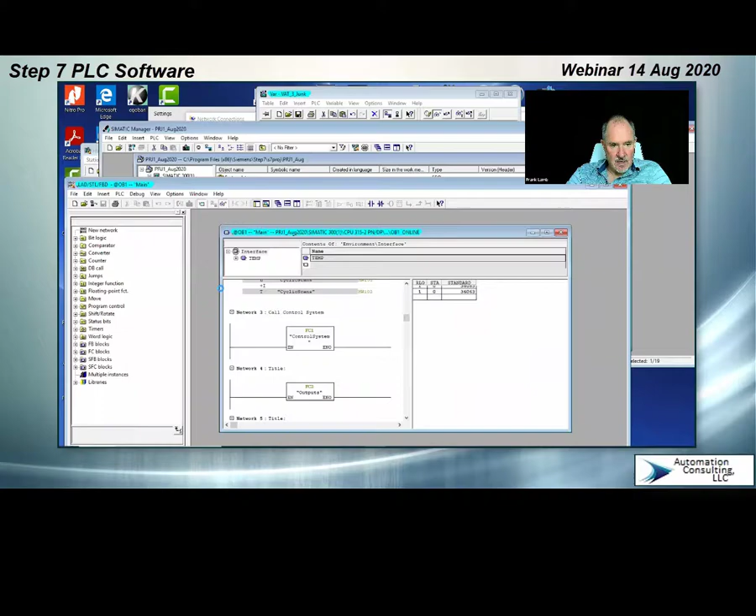What this does is sets auto and manual mode using push buttons. Then we do a cycle start. As in my book, we use a timer, 3-second timer. So when the push button is on, the timer times.

You can see we're already in auto cycle here. What this does is prevents the cycle start request from being on when you're pushing the button if you're not already in auto cycle. So this is kind of important because we use this to sound the horn if we wanted to give a warning to people that the system's starting up. So this prevents the horn from sounding when the system's already in auto cycle.

Cycle stop request. You can see here, if we don't have a permissive for the cycle stop request, then it just sits there and waits. I'm going to toggle that and push the button. You can see here we are in auto cycle. I toggle the button. We have a request for cycle stop, but we're not allowed to stop the cycle yet until the permissive appears here.

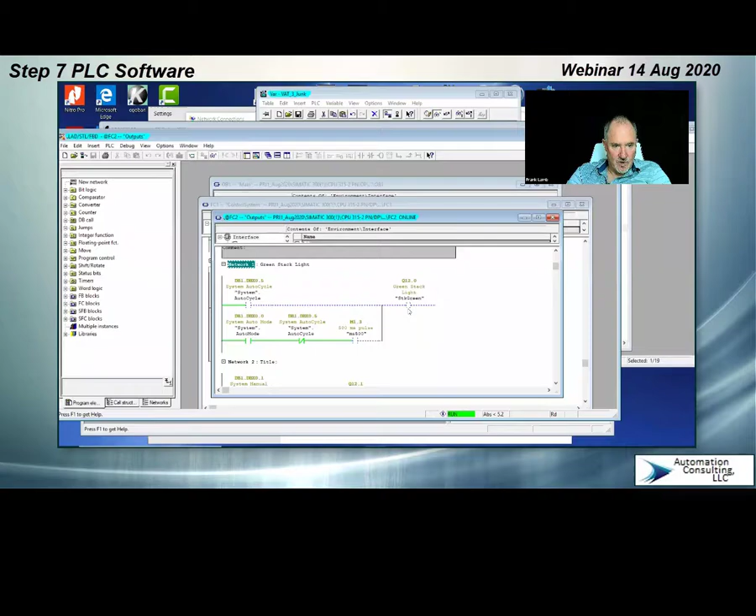Other things I've done here is I created some physical outputs. The stack light, you can see here we're not in auto cycle, so the stack light would be blinking. The idea behind the stack light is this is the trainer that I'm using here. It has a stack light on it. This is the Siemens trainer that I'm using. You can see it's in run mode down here. I've got it connected via Ethernet. It's similar to this trainer, which was the trainer that I used last week for the Allen-Bradley seminar.

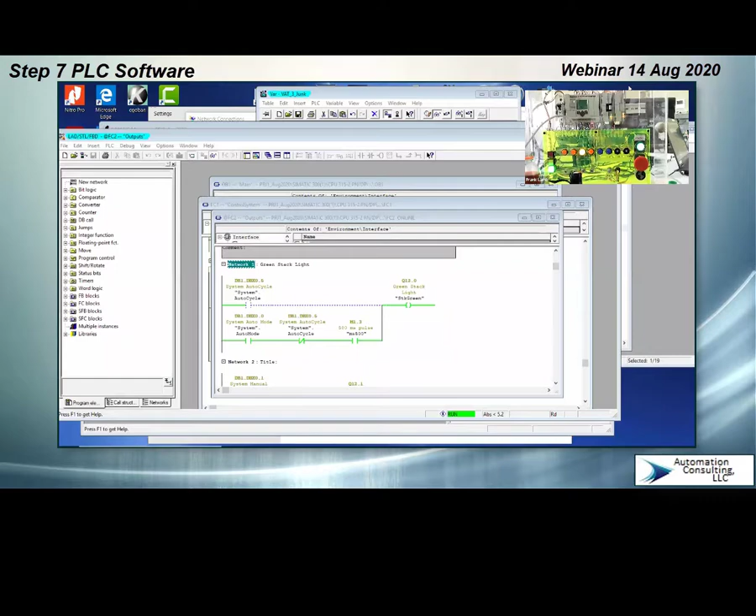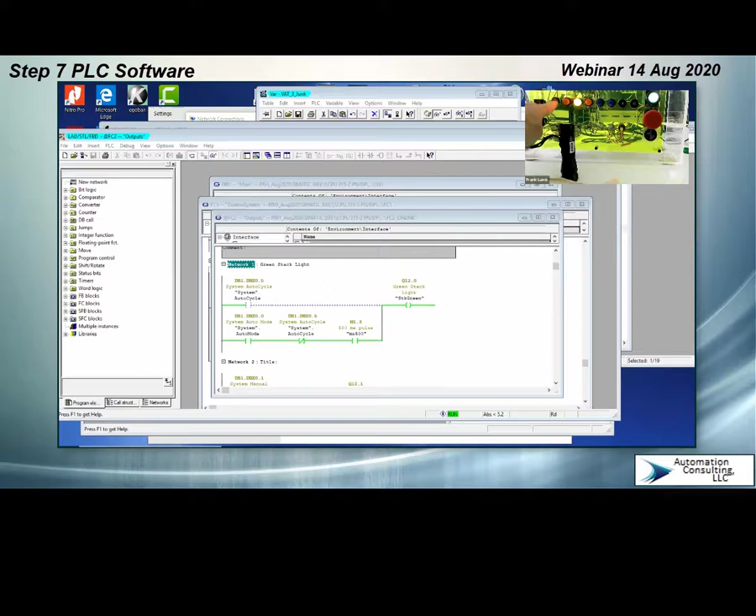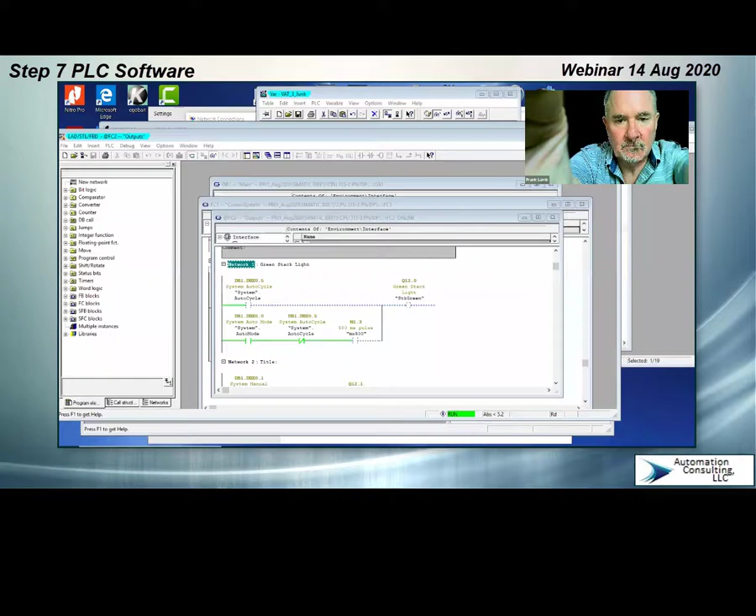So you can see the stack light down here, which is already lit. If I do a cycle stop, here you can see it blinking. So that is similar to what would be going down here, but I haven't wired this all up yet. So cycle start. And you're blinking. And that's the same kind of thing that we have here. So once again, stack light is yellow if we're in manual mode, and it's red if we have a fault. So that's all I'm really doing with the physical outputs here. Notice that I've assigned them to Q12, which is the first card that I have in the outputs.

Let's take a quick look at the hardware, see what we've got here. This is the hardware setup that I've got currently. Got some input cards here, words 0 and 1. Those would be I0 and I1 bytes. These are I4 and I5 bytes. These are the defaults that are assigned based on the slot position. So slot 4 is always assigned to byte 0 through byte 3. Slot 5 is always assigned to byte 4 through byte 7, and so on. Slot, let's see, 6 is an output card, slot 7 is an output card, and then slot 8 is an analog card. So that's kind of how we've set up the hardware.

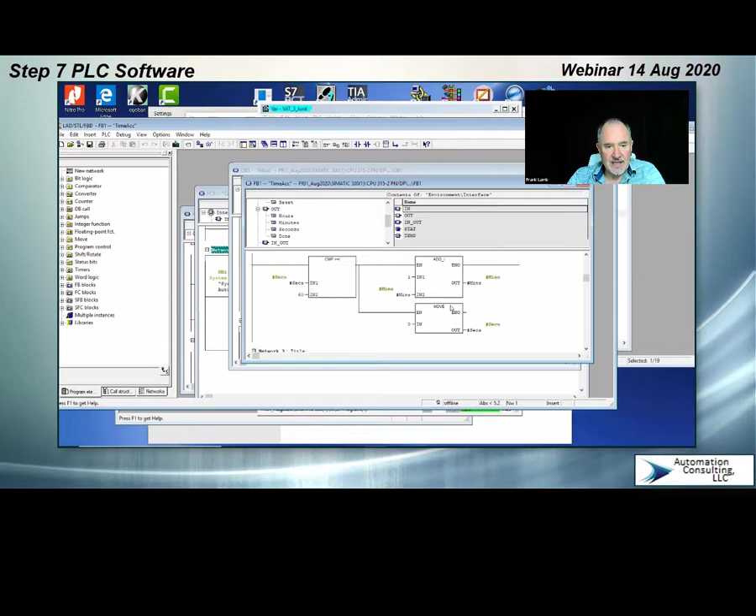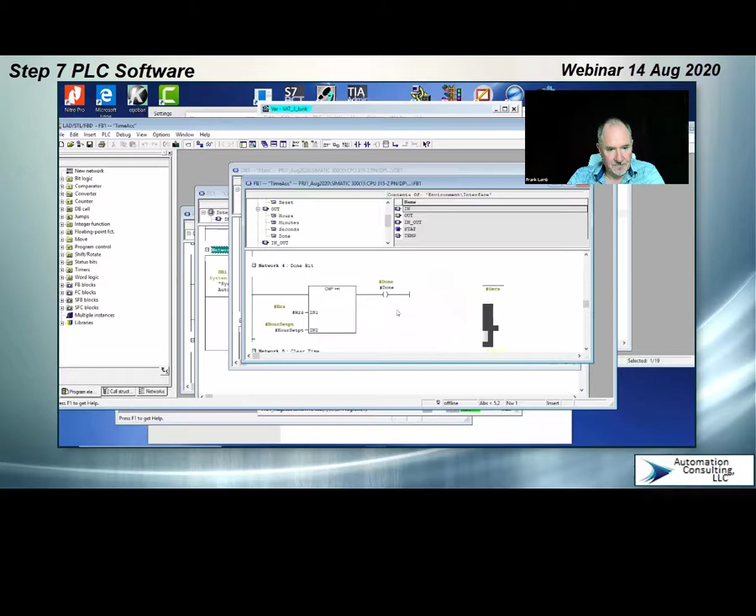So we're just counting here, adding seconds. When the seconds are at 60, we add 1 to the minutes and reset the seconds. So that's just like a counter, except I'm not using Siemens counters. Once again, when the minutes hit 60, we count the hours. We move 0 into the minutes. When the hours are greater than whatever you have as your set point, then you are done. Done bit comes on, which is an output parameter. So it comes on as a bit. The reset moves zeros into all 3 of the seconds, minutes, and hours.

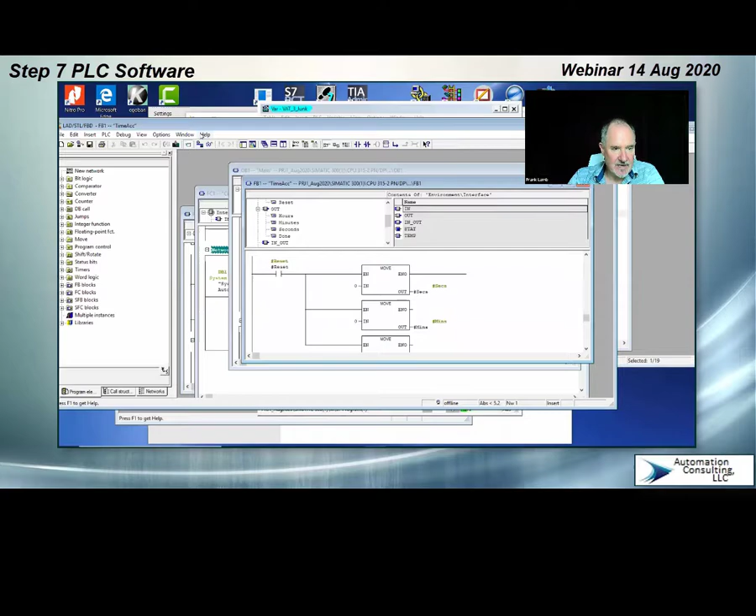And then here, notice that I use statement list, STL. And the reason is if I had used move statements like this, right? Here are 3 move statements with a reset. It would have looked something like this. So there would have been a whole lot of JNBs. And the only thing we really needed was the load and transfers, right? Load 0 into minutes, transfer into minutes, and so on. And that's why I did this.

So I actually did it in ladder first, converted it to statement list, and then there was a whole lot of extra stuff. And so I just deleted the extra stuff. And this just constantly moves this stat variable into the output variable. The reason we had to do this, you can't do any math or add or anything to output variables.

So for instance, if I had tried to pass this out, I couldn't add the hours to the hours. It wouldn't let me do that to an output variable. You can't add it, at least not in ladder. Sometimes you can do that in statement list, but you can't do it in ladder. So I'm just guessing here.

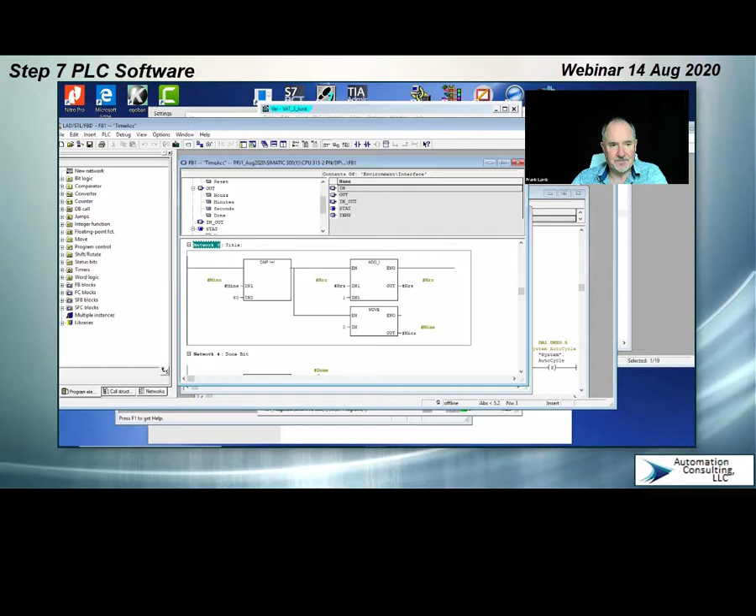But there is no one else on this call. I'm the only participant, which is why I'm talking to myself. I'm just recording all of this. No one showed up today. I'm the only one, but I'm recording it anyway. So we'll see how that works out. Got about 25 minutes left. Don't know if anybody else is going to show up. If they do, we're ready to go.

So that's a bit about the function block that's doing the time accumulation. This is a reusable function block, which means that everything in here are these local variables. I did not use any memory words or data blocks inside of here. Everything has to be local up here in these parameters. Very important to make it reusable.

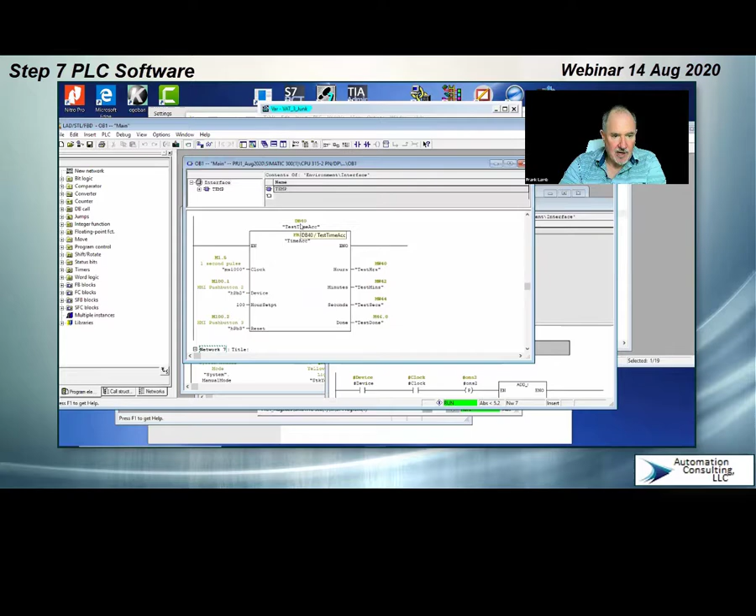Now, what I mean by reusable is if I go to OB1, you can see that I call FB1 with one data block here, and I pass these variables out, and I'm using different variables in. I'm using a couple push buttons. And then down here, I call the same FB1 again, but I use a different data block. These are called instance data blocks. They get created automatically.

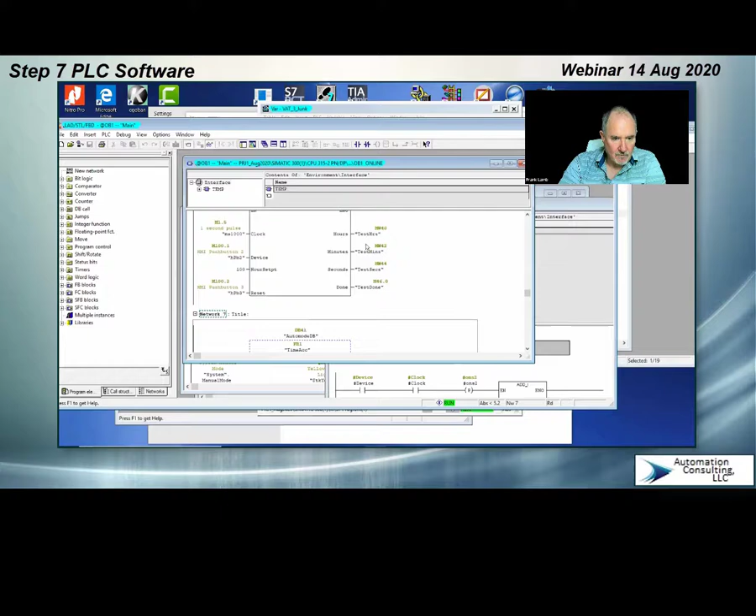And if I monitor these, you can see I've got different times in here than I do in here. So we got 54 minutes, 21 seconds here. You've got 18 minutes and 4, 5, 6 seconds here. So we're using different internal data blocks.

Here I use memory words just as a test, right? Made test hours, minutes, and seconds. And here I used a UDT. So I made something called auto time, and then I used the UDT to put the values in it. Now you notice here, my hour set point is at 0 here, and that's why my done bit is on here. So I'm going to change that.

I'm going to go into my junk DB here, and we'll just put in this hour set point, which is DB4.DBW6. So if I make this decimal, we can then put any kind of set point we want in here. I made that part of the UDT. Make that a little wider. And we'll put, say, 10 in here. And we'll let it run for a while.

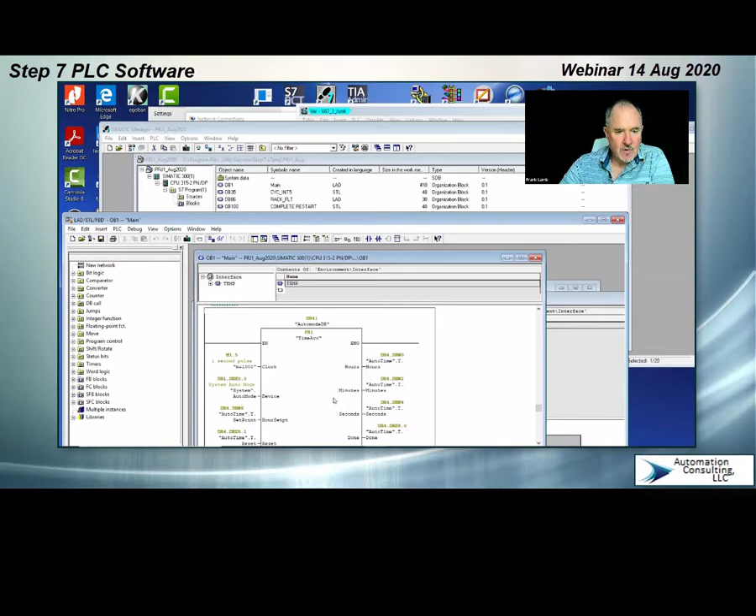So once again, make sure it's saved, downloaded. There's nothing wrong with downloading more than once. So here I have my little test FB with DB40. Here I have my time accumulation for auto mode, right? And the next thing I'm going to do is copy this, paste it.

We're still going to use this same little ticking time pulse, but this time we're going to use machine status. Actually, we're not. We're going to use system. And we're going to do our starved first, I believe. Then we're going to use our machine status.

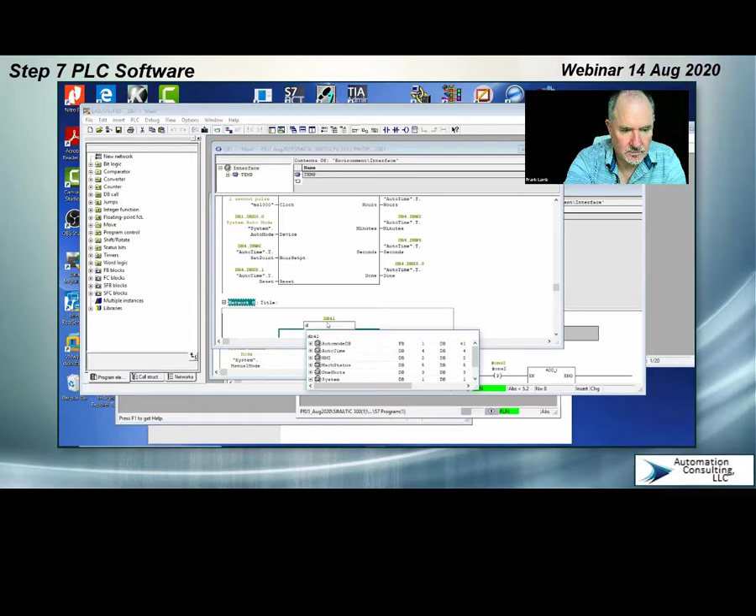Minutes. Seconds. And done. So now I've got all my output variables here, and we're going to use a new data block. We'll use DB42. And it says it doesn't exist yet. Do you want to create it? Yes, I do. We don't have a name for it yet.

So we're going to call it starved DB. So very important, we want to download this data block first. And then, I think we've downloaded the other data block. Now we can download OB1.

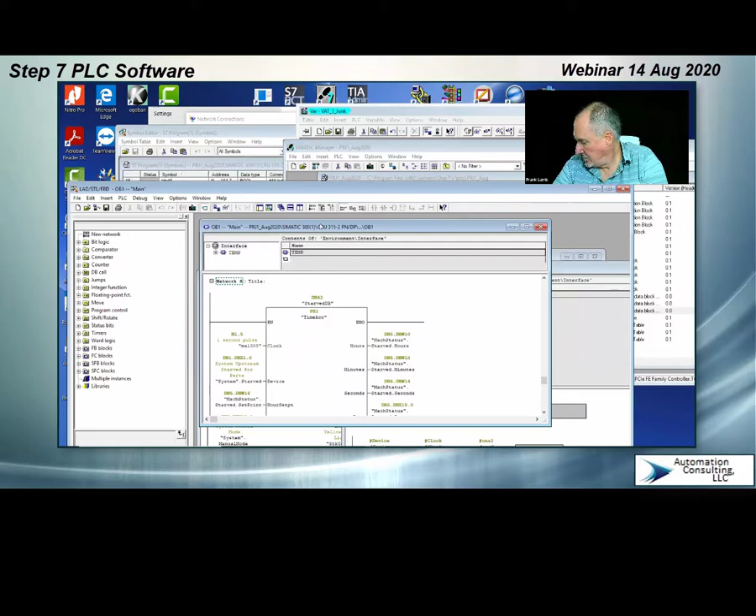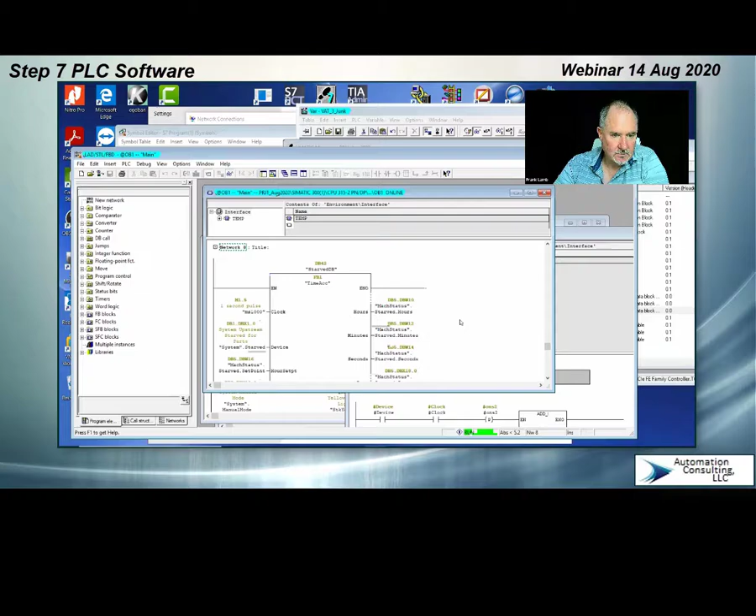And we're running okay. We don't have any red lights, that sort of thing. It's very important. Go ahead and see if we're, whoop, accidentally hit download instead of my glasses. That's okay. So we're going to toggle our starved device here. There we go. You can see we're one.

It's kind of not obvious where some of these things are. And you can see we are accumulating our time. And our time just sits there at 29, with the clock ticking away.

So if I go offline, paste this a couple times, it's actually pretty easy to just change these to whatever we need them to be. Say DB43 doesn't exist. I want to generate it. DB44 doesn't exist. We want to generate it.

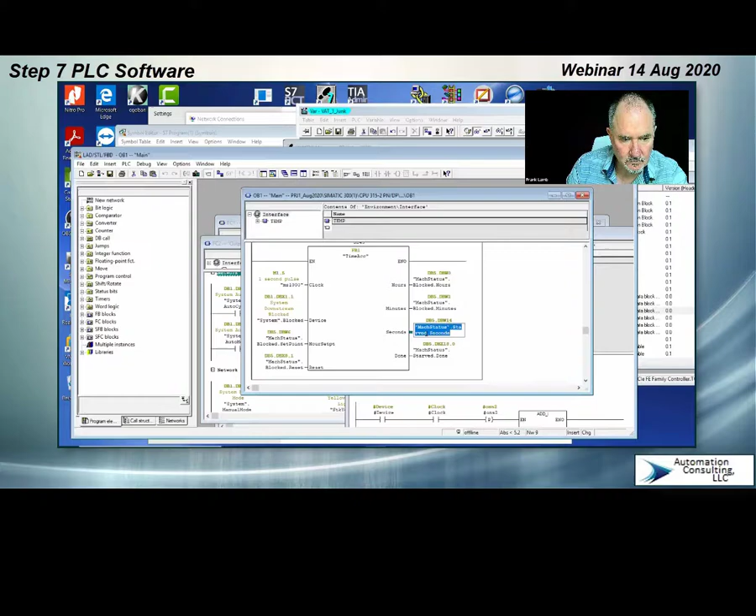If you're a really fast typist, then you can just type this in, but I'm better with the mouse than I am with the keys. So this is pretty quick compared to typing everything in all the time.

So before we download this, it's going to be very important to download all the data blocks first. But I'm going to show you right after this what happens if you accidentally download OB1 before you download the blocks. So we'll make this, I don't remember if this is idle, what we did here. But I think we can just pick anything. I don't think it really matters which block is which. We just need to remember which is which.

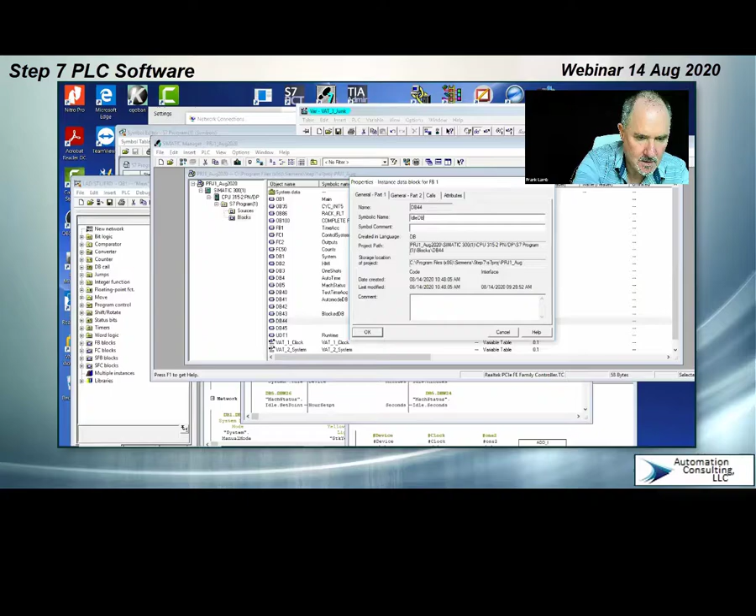These names aren't super critical here, but where they do show up, and I'm going to purposely kind of forget some things here. Where they do show up is here. So that kind of shows you what this block is, and it allows you to match the data block to all these tags. So now I'm going to show you what happens if I do a download here.

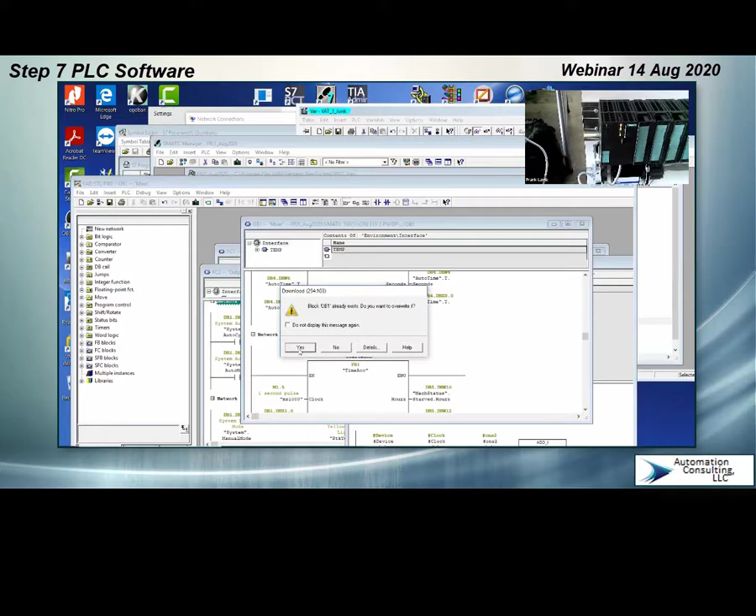It's going to cause a problem if I download OB1. So I'm going to go ahead and do it. While I'm doing it, we're going to look down here at the processor and see what happens. So I'm going to hit download. Says it already exists. Yes. And what happened? We got a red fault light.

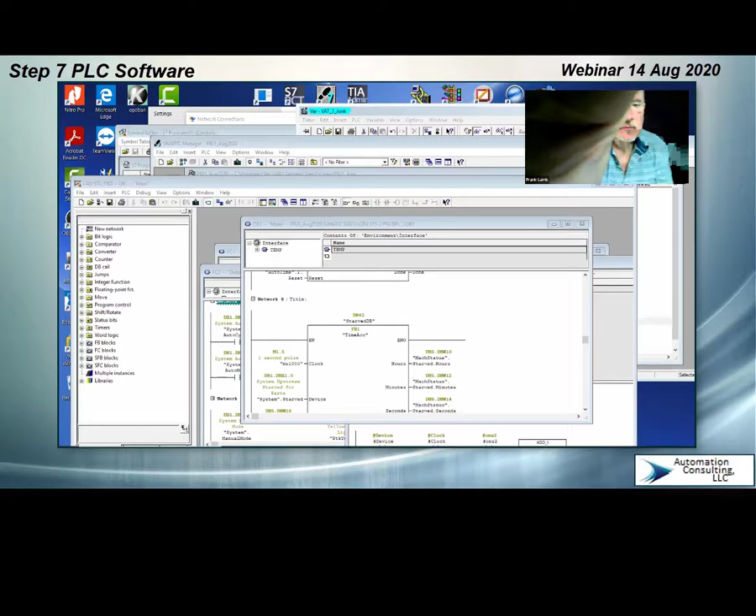And the reason we got the fault light is because I'm using all of these data blocks, but they don't exist in the processor yet, right? So here's a way to check that. Okay, so here's how you check that out. If I go here and I look at processor, you can see 41, 42 are in there, but the other ones aren't.

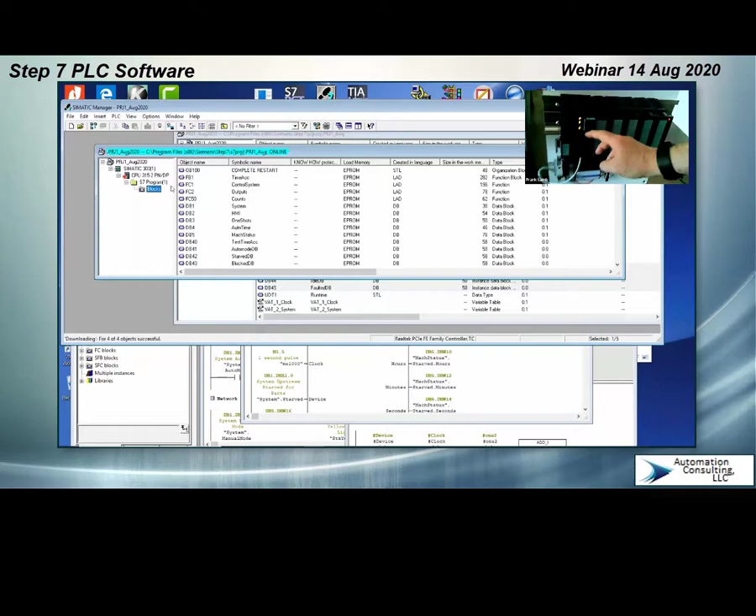So I'm going to download 45, 44. I'm going to download all 4 of these. And you can say all here. Now they're all in the processor. If I'm not sure, I can always go here and look. So how do I fix the problem with the processor, which is this fault? Well, of course I can reset this with this button. That will fix it.

But the other thing I can do here is I can download OB121 and 122. They take care of faults like that. So we're going to create those real quick, download them. And they will stop us from going into stop mode every time we fault when we have a programming error. So a common programming error would be forgetting to download things. That is the job of OB121 and 122. So you download these, and they prevent the processor from stopping.

Well, that is the end of, oh, someone showed up. Hello, Lloyd. Are you there? Can you hear me? So I can't see you or hear you, but it looks like you're here. So this is a little group chat. You can see this here. Unfortunately, Lloyd, I don't know if you can hear me. Hopefully you can.

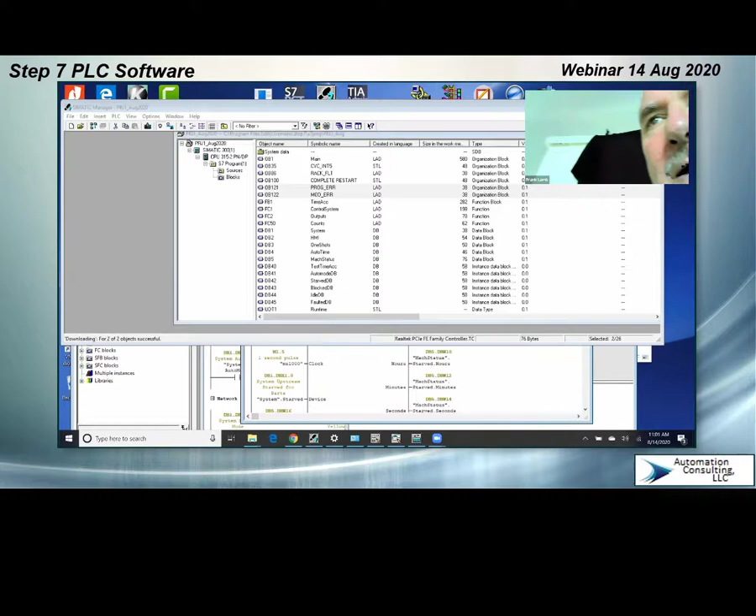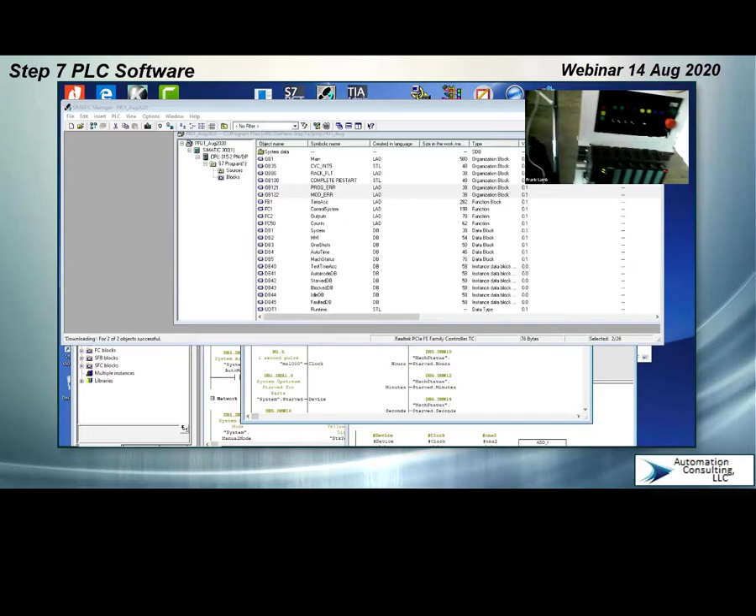So this project I started yesterday. Let me see if I can see your camera, but I don't think you can see my camera. I can actually see you, but all right, yes. Can you see a PLC down here? Yes, I can see. It's a Siemens PLC. Yeah. Okay, good. So this is the trainer that I'm using. And I just built this yesterday. So I just put power to it, but I haven't wired anything up to it yet. So you can see there's no wires on the back. Yes, I see.

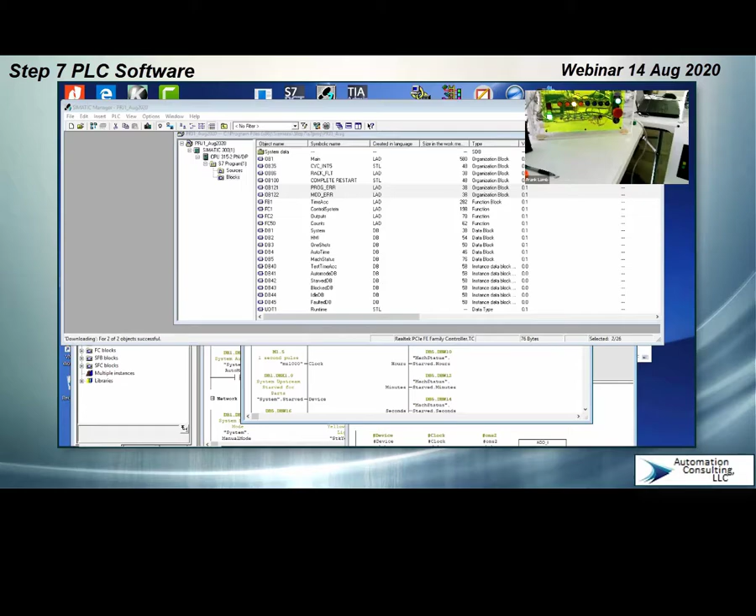Everything that I did here was kind of virtual. This is another PLC that I used last week. So this is an Allen Bradley, and I did a little seminar last week, just like this here. And it's the same, right? It has the same buttons and switches and things like that on it. Yes. But anyway, so that's the way that works. So that's me. All right.

So I'll show you a little bit of what I did here. So of course, first I created a processor and downloaded it yesterday, and then created various different things in the OBs. So the first thing I created here, this is a typical way to do an always off and always on bit.

People use these for system bits, right? Just always on, always off. If I look at it here, this little not bit, this is a cute way of doing it. You know, Allen Bradley, you do it a little bit differently. With Allen Bradley, I can connect directly to the rail with no instructions. That's legal. But with Siemens, of course, you have to use a bit of some kind in series. So this is a cute way to do it.

I used a little bit of statement list, STL, right? Okay. So this is simply an adder. It takes one, puts it into the accumulator, and then memory word 102, which is just an arbitrary memory word, I add it to it and I transfer it back into itself. So it's just an add, kind of like this is, right? One plus this into this. It's the same thing, but it's in statement list.

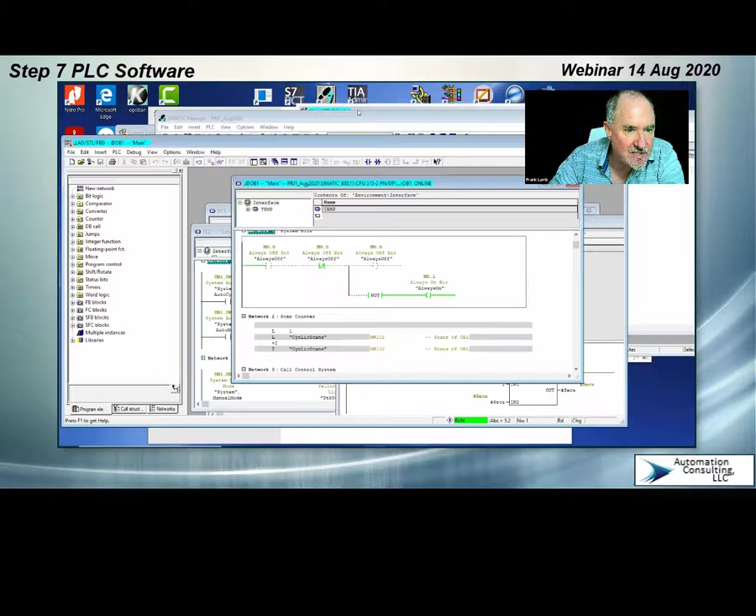So the end result of that is every scan, this is adding. If I look at my variable table, I have this little junk routine here, and this does cyclic scans. Every scan, it's adding one to it. It's just going as fast as it can. Okay, so I just did that to illustrate how scans work. And I use these memory words just arbitrarily. I just picked them, and it doesn't really matter. That's what the M area really is.

So first scans, this is inside of OB100. I don't know if you knew what all the extra OBs do. Are you familiar with those? Organization block 100 is a first scan OB, right? What's that? Are we talking about something like in the Allen Bradley RSLogix 500, the one-shot falling or one-shot scans?

No. If you were doing Allen Bradley, there is a bit in the MicroLogix, for instance, called first scan. It's actually S:1/15. Here, instead of using a bit, which there is a bit, they actually use a whole routine. So this routine runs one time every time you restart the processor. Yes. So all OBs have special purposes. OB100's special purpose is it runs one time on first scan.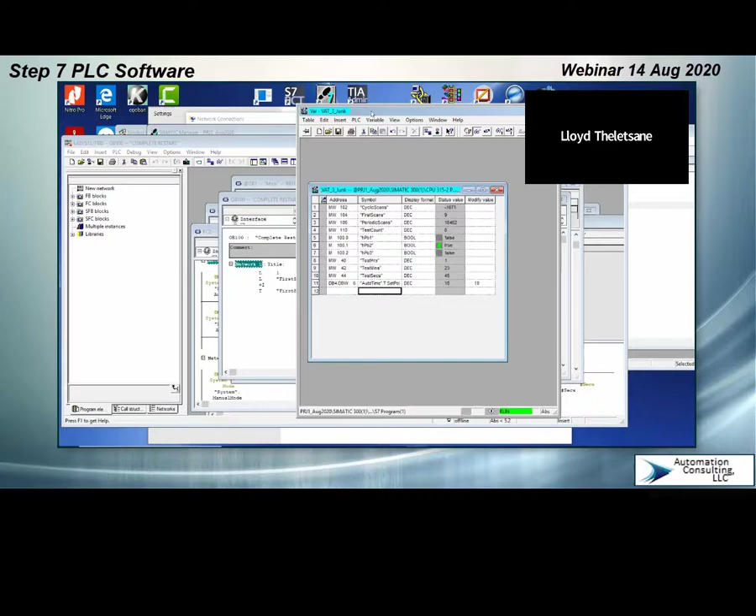So the end result is if I stop the processor, I'm going to stop the processor here, right? So I stop it. It's not in run mode. And when I restart it, this 6 up here is going to go to a 7. Did you see it? Okay. Yeah, the first scan. So if I do it again, it goes again, right? It's counting first scans. Okay. So OBs are all blocks with special purposes. That's this one's job.

It runs the first time. Now these periodic scans, what I did here, it's another OB, and it's a hardware OB. You actually set it up in the hardware. So I'm going to show you that here. There's OB35. If I open it up, it has another little adder inside of it. It's doing the same thing. But the way you set that up is you go into your hardware.

So this is the hardware configuration. This is where you set up all your inputs, outputs, etc. That's where I got my addresses, 0 and 1, 4 and 5, 8 and 9, right? Q8.0, Q9.0, that's what all these are. But if I double click the processor, there's a couple things here that are good to know. This is the clock memory. This is where I assigned a clock byte. I just put a 1 in there.

And this is cyclic interrupts. So you see the 35? OB35, yes. So that's an interrupt that runs every half second. It runs whatever time you want to put in here. So if I put 800 in here, then every 800 milliseconds that will run, right? It's in milliseconds.

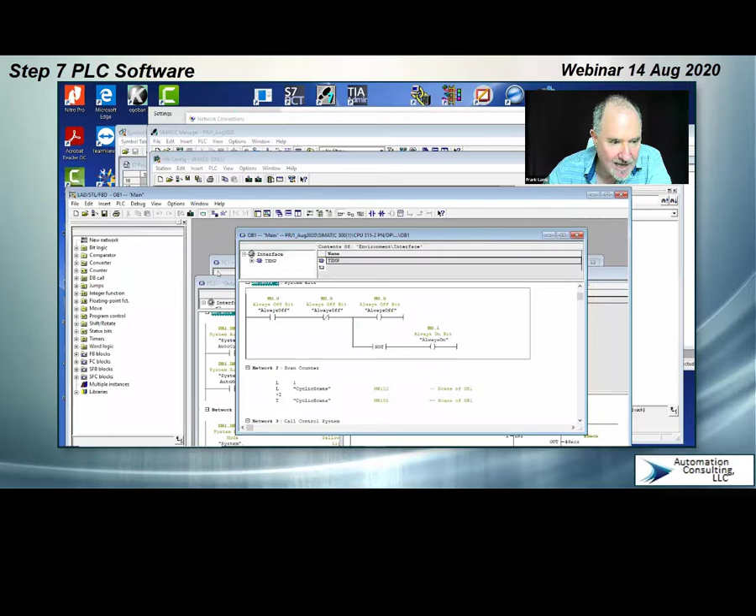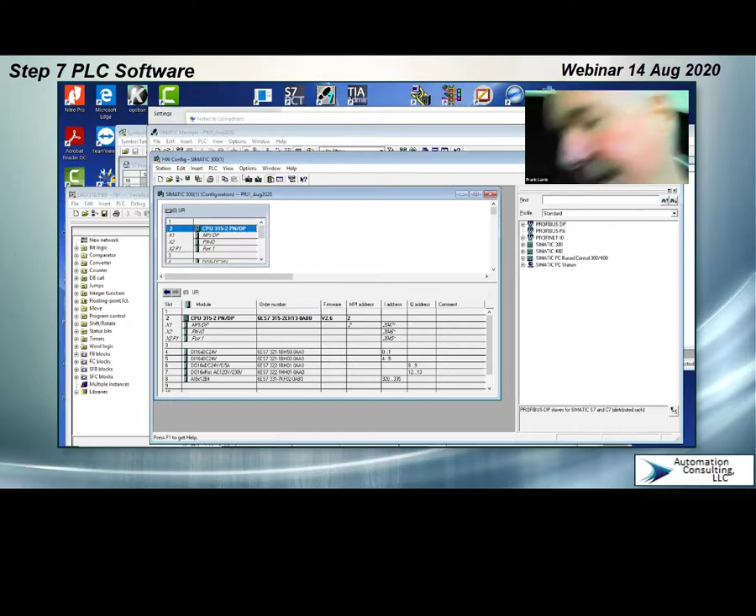So basically during that moment, is your PC on? Is your PLC on by that time? Is your process running, or it has to be off? It is running. It is running, right? So let's try another download, and you can look at it as I download it. So you can see the green light there means it's running. If I do a download now, let's see if it runs. Okay.

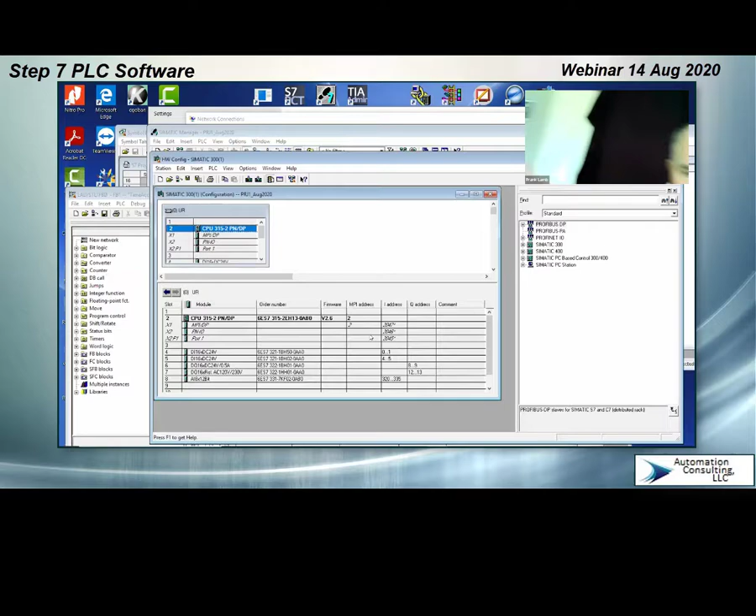Okay, here we go. It says will be stopped for loading of the system data. So it stops, right? It's yellow now, and then it says, do you want a complete restart? Yes. So it blinks a little bit, and now it's back running again. Okay. All right. So anytime you change hardware, you have to do that. Okay. So these other changes, right?

If I change something, some minor thing in the code, I can download and it does not stop the processor. That's a difference between Allen Bradley and Siemens. When I do a download, I don't stop anything in Siemens. Okay. All right. So we'll quickly take a look here, and I'll do some kind of a download. We'll talk about that one later. We'll monitor this.

Okay, so I'm looking at OB1 here, right? It's calling these routines. That's what these are, subroutine calls. I can monitor it, right?

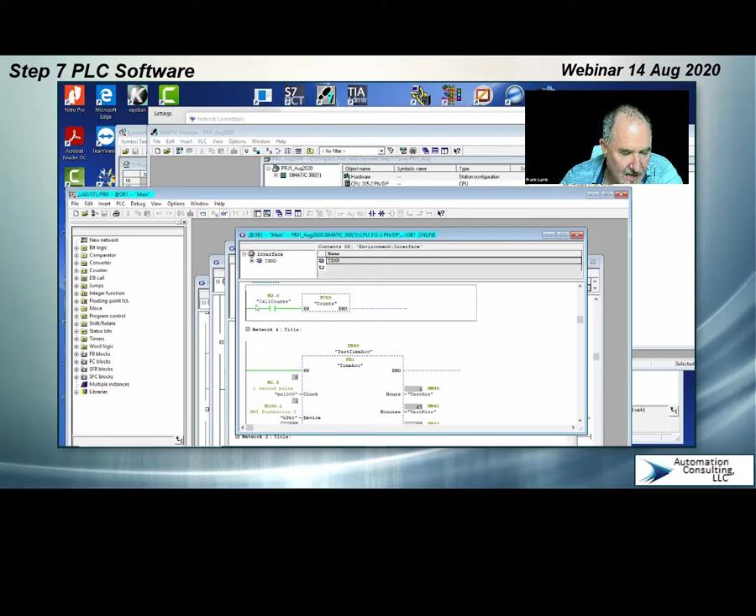Now I'm back with my glasses. That's what you do, turn the glasses on and you can see everything.

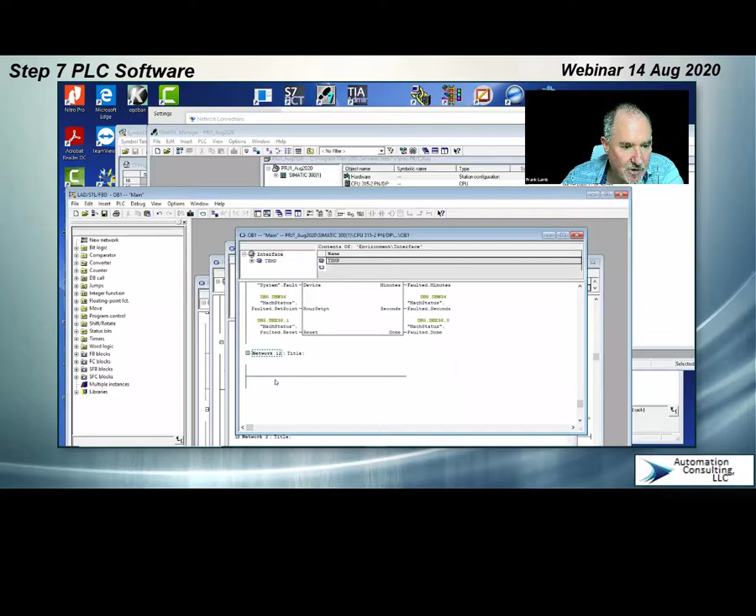Okay, and I'm gonna make a code change here. And that'll kind of show you that I'm not gonna stop the processor to do that. So to do that, you turn this off. I put a rung in here, and I already have some kind of pre-prepared bits. So I'm going to call this HPB4. This is in the symbol table.

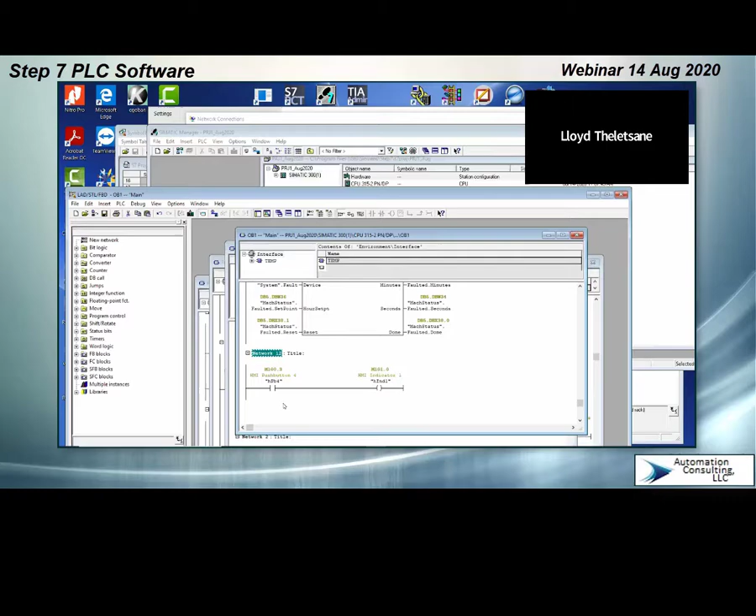And HIND4, these are fake, they're just fake indicators and bits that I put in here. Okay. So there's a change, right? Okay, so I save it and I download it, and it will not stop the processor. Okay, so the processor's still running, nothing's changed.

I'm back to monitoring, and you can see that, indeed, it is running. Right, I turn on HPB4 and HIND4 is on. Okay, all right. So that's the general idea behind that. You can make any change you want to.

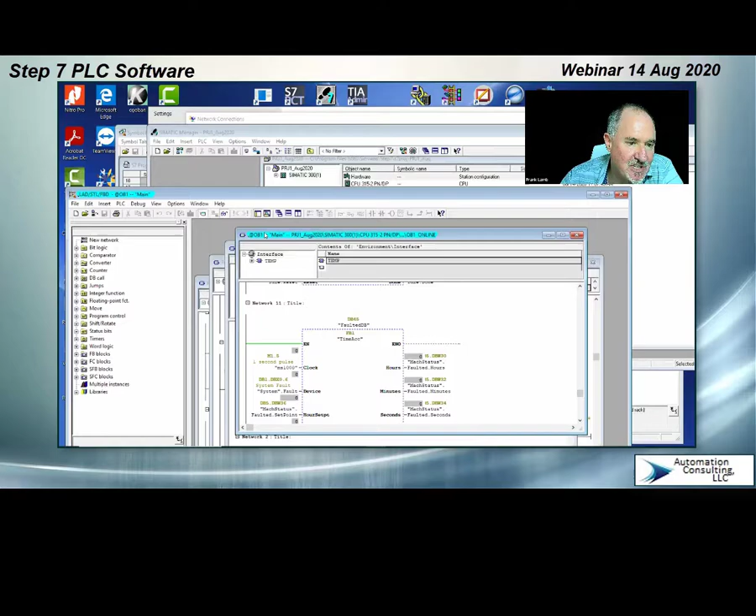Now, OB1, its job is the same as main routine or ladder 2 in Allen Bradley. Yeah, it runs all the time. It calls all the other routines. So all these other ones, FCs, all an FC is a subroutine. Okay. So I'm going to monitor this subroutine.

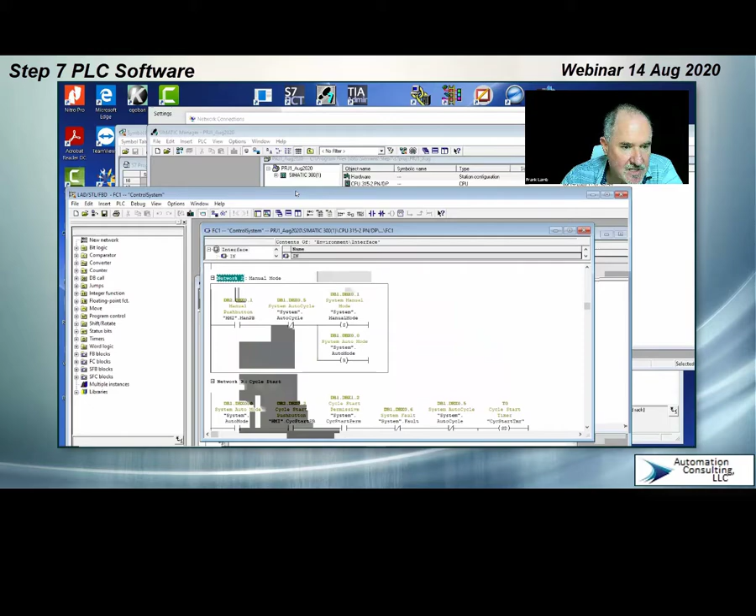This is the same thing I did last week. I don't think you were on last week's call. No, I was on, yeah. Oh, you were? Okay. No, I wasn't. I wasn't on. Oh, you weren't on.

Okay. So what this is, I made a system routine here. And what this is in auto and manual mode, right? And I even used a little, let's see what this is. Turn that off.

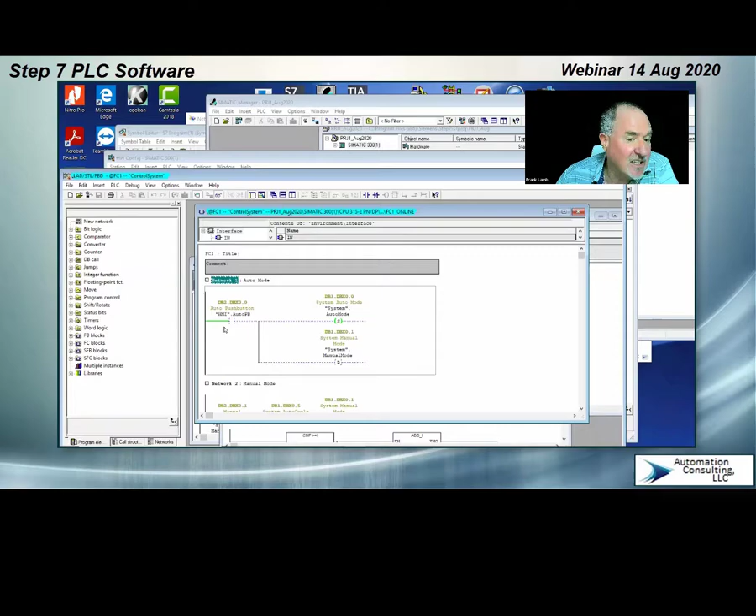So Siemens, are you familiar with Siemens? Do you use it a lot? No. I just started RSLogix 500. So on Siemens, I'm just completely a beginner. Okay. So even some of the things that you're doing, yeah, but it's ladder like any other ladder, right?

But the difference is here, instead of using B3s and things like that, you can create in Siemens. This is what makes Siemens a lot more powerful than the Logix 500. Siemens allows you to create things like this. Okay, here's a data block. So what I did here is I just typed things in, right? I'll create a new data block. So data blocks are just collections of data. So insert new object, data block.

Okay, I can make a name for it, and I'll just call it stuff, right? I don't have a good name for it, so I just call it stuff. All right, so it doesn't have anything in it, so you can put things in it, right? Right now it has this little test integer, but I'm going to call it word1. Okay, since it's an integer, it's a word, and you can name it, comment it, anything you want to. Comment 1.

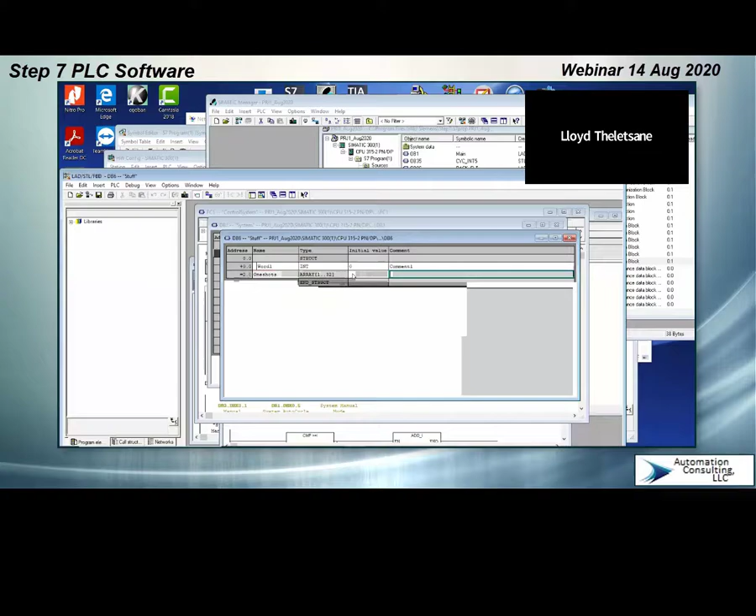Okay, I hit enter. You can also create an array, for instance, which of course in RSLogix 500 you can't create an array. But this is a handy thing to be able to do. So for instance, I want one-shots. I go ahead and create an array of one-shots, and I can number them, we'll say from 1 to 32. And you have to type it in this way. So Siemens is picky about how you type things. So I can make an array of anything. It could be an array of words, but I'm going to make it an array of bools, which are bits.

Yeah, bits. Okay. So once I do that, you notice this jumped here to 6. So it's saying you've got 6 bytes worth of data in here. Word 1 is 2 bytes, and then all these one-shots. I made 32 one-shots. That's 32 bits. Here's another way to look at it. It's a data view, right? So now I have one-shots 1, 2, 3, all the way down through 32.

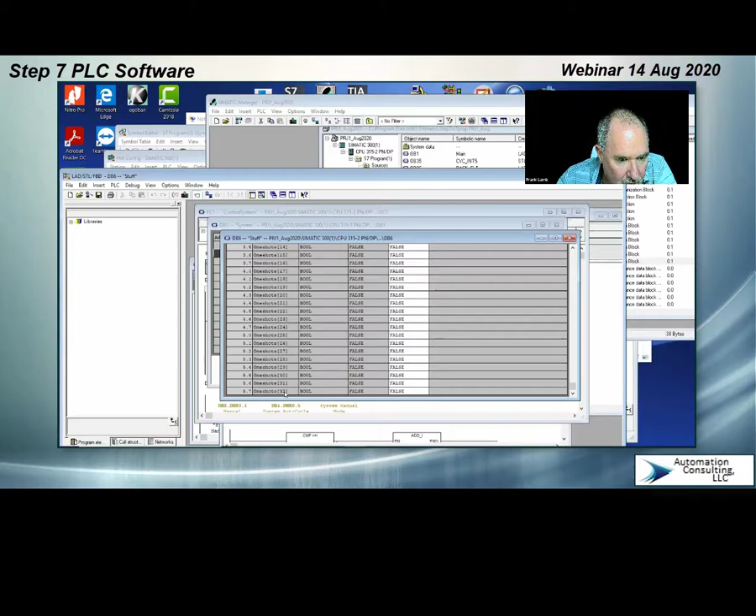If you were doing this with Allen Bradley, you can create arrays in ControlLogix also, but you must start at 0. So one of the things I like about Siemens that is not as good in Allen Bradley is I can number things from 1, right? Allen Bradley would have been 0 through 31. Not just starting at 0. That's right.

So if I had like recipes and the operator is going to choose recipe 1, recipe 2, recipe 3, I'm wasting recipe 0, right? Oh, okay, the operator doesn't like 0. Yeah, because the 0 is not existent, it's only on the PLC that it's being recognized. So he wants to start at 1. That's a more familiar way. That's right. So I could have made recipe 1, recipe 2, recipe 3 that way. But instead here, these are just one-shots. So if I want to use bits as one-shots, I can just use these as I need to.

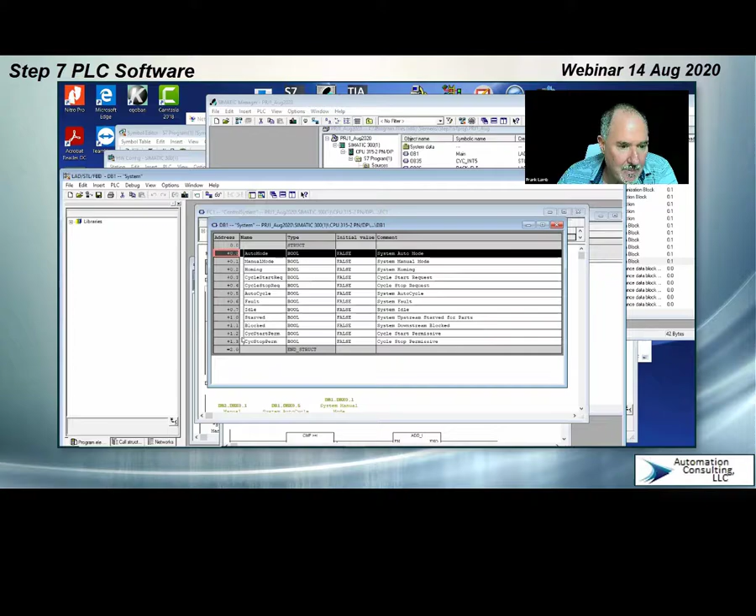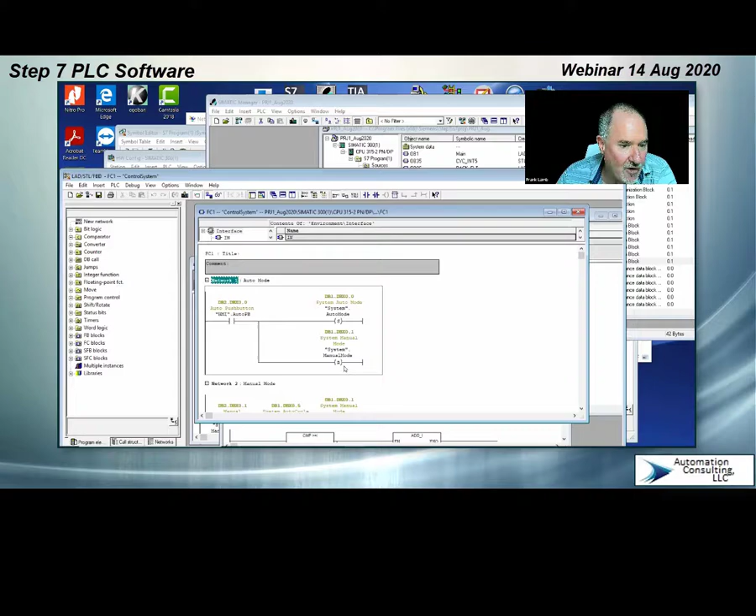Anytime you create these, of course, you have to download them into the processor. So these system bits, all these are just names. I made cycle start permissive. I just made names for everything and made bools. So where I used those was here, right? They have these hard addresses, but it gives you a nice name. It says HMI. I used an HMI block and I called this auto push button. And system block, DB1 is system block, and there's my auto mode and manual mode. And then I put comments in there and all this kind of stuff.

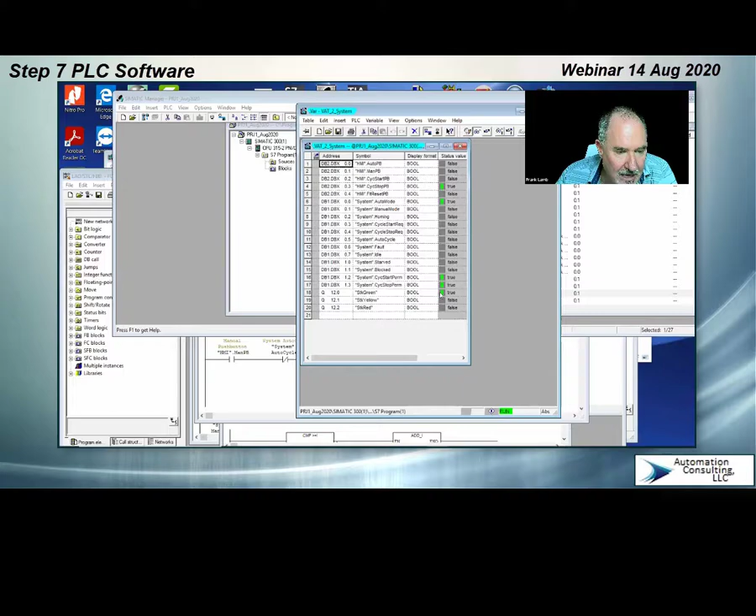Then in here, in the blocks, you can also create variable tables. So I created a variable table for the system, and if I monitor it, I can see all the different things happening. Like I've got a stack light here. If I go in here, I'm not in auto cycle, right? If I monitor this, you'll see that I'm not in auto cycle, so that's off. And the way I go into auto cycle is if I'm in auto mode, which I just toggle bits. These are just latched bits. So I'm in auto mode right now because I pressed the auto push button.

If I press the manual push button, I can just modify it to a 1, and you go down here and you can see I'm in manual mode. I toggled it, so I'm pushing a fake push button. Okay. So now for auto push button, I'm going to do the same thing. Push the auto push button.

Turn it back off. This simulates a spring return push button. Okay, I'm going to turn this off too because I shouldn't be cycle stopping. All right. So now if I press the auto cycle start push button, which is down here, as long as I have this cycle start permissive, which is another just imaginary bit, right? I just made it up. Then this will run for 3 seconds.

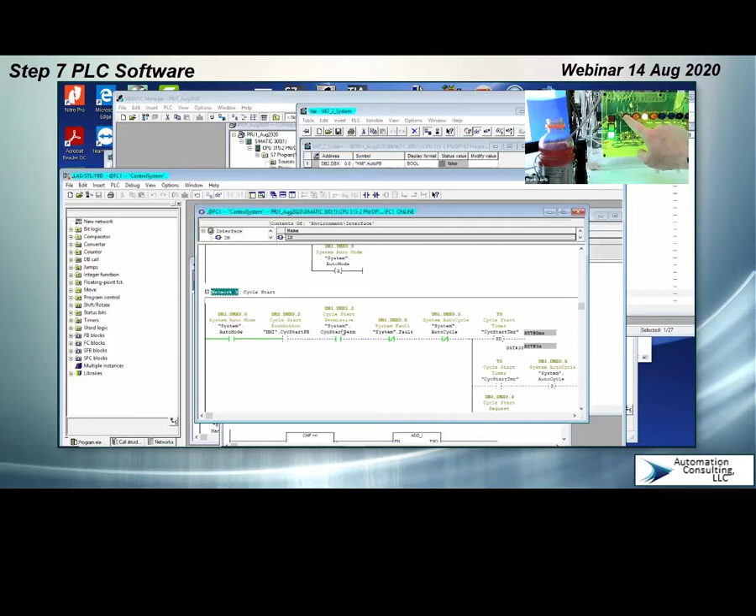It'll beep a buzzer, something like that. I'll show you what this one looks like. So this is my Allen Bradley. If I stop it, see there's my blinking light. Okay, as I push the button, beep, beep, and then I go into auto cycle. Oh, that's your 3 seconds.

That's my 3 seconds. So the idea is that while it's beeping, it's warning people, watch out, the machine's about to start. Yeah. That's right. So the way I do that, there's kind of a lot to it. You have to be allowed to cycle start. So for instance, maybe I need to detect that I have air on the machine, or maybe the e-stop's not hit, whatever my cycle start permissive is. So I just latched it here.

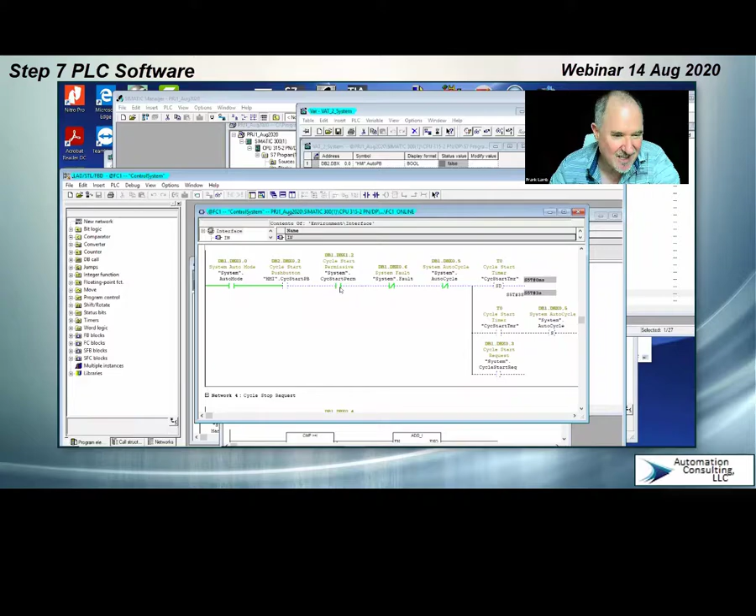I left it on. You have the same kind of thing here for this cycle stop push button. Do I want to stop immediately? Not necessarily, right? If, for instance, I had some kind of a pick and place and I'm picking something up and carrying it over here, I may want to wait until I got rid of my part to stop my machine. So in that case, my cycle stop permissive would not be on. So I'm going to modify it to a 0. It's not on. Now I'm in auto cycle. I'm telling it I want to stop.

But let's see here. Monitoring's kind of hard in Siemens. There we go. Oh, it says I'm not in auto cycle. Why is that? Modify to 0. Did I have a fault? No, I didn't have a fault. Cycle start permissive. Oh, I probably didn't even run it. Yeah, beep. There we go. Okay, turn that off. Now I'm in auto cycle.

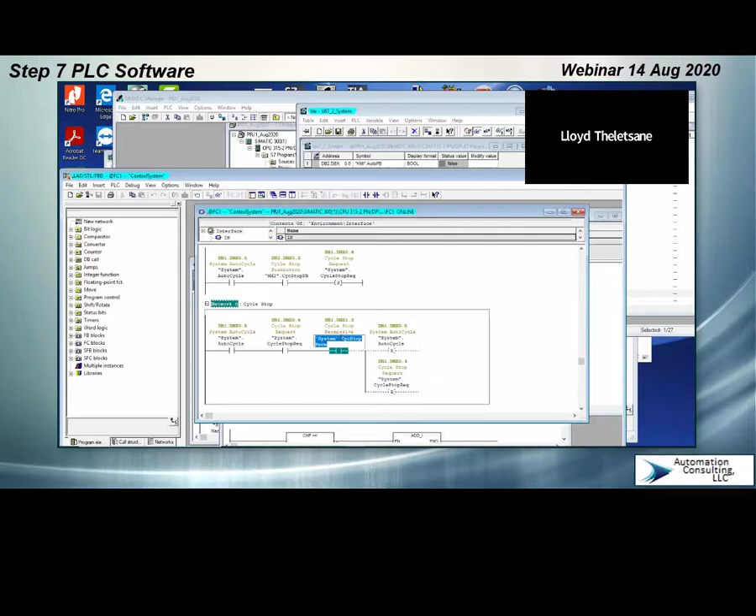And now I'm going to turn this on, which is going to say, I want to stop this cycle. Notice it does not stop. And now I modify it to 0. It remembers that it's been asked to stop, but it doesn't stop yet. So I'm running, I'm moving, I'm doing my thing, and then all of a sudden I stop doing my thing, and then it says, okay, you're ready to stop. There it goes. Now I stop my auto cycle. So I would be blinking. Okay, so that's the way all that works.

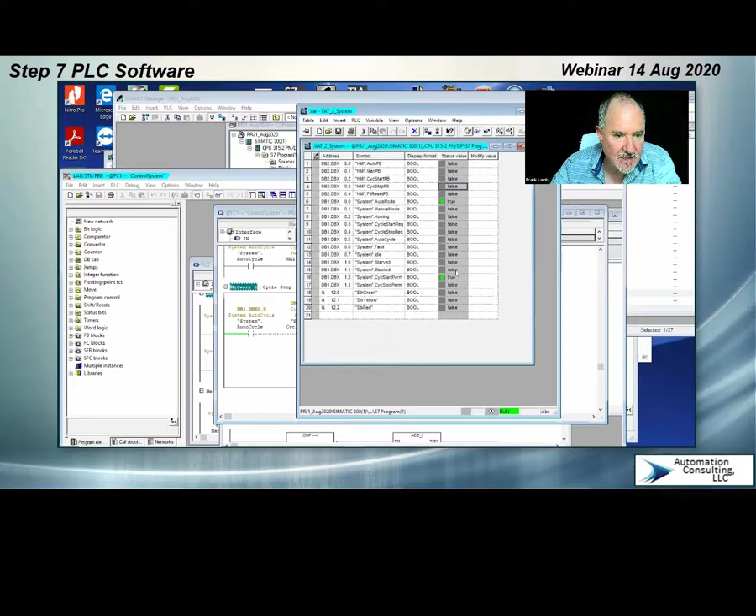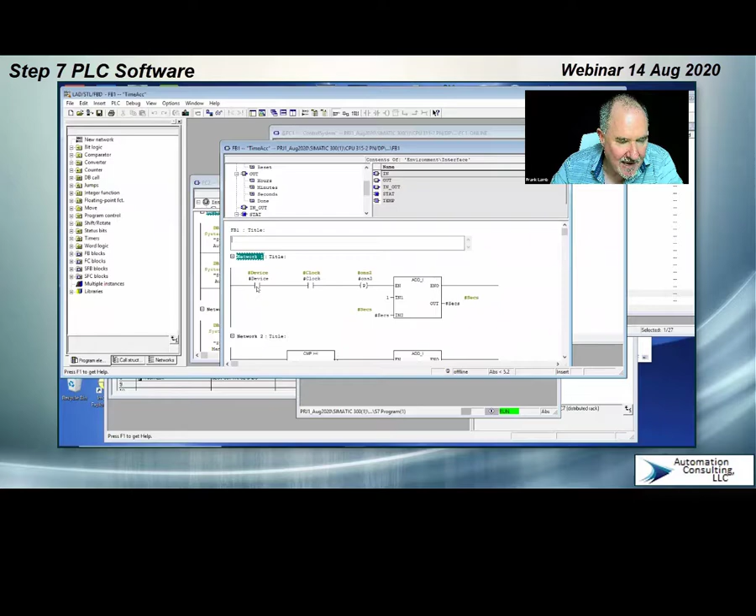So that's what FC1 is doing. And what I also did here is I made starved and blocked and different things in here. We'll turn this one on. I'm going to show you what I did with that. What I did here is I made an hour accumulator in a function block. This is the same thing that we were doing before. I take an input called a device, and I have a clock pulse. The clock pulse is that pulsing bit that you saw before.

So let's see, where is it? That clock. So that accumulator type, yes, this will accumulate time. And we'll close that. You can see how confusing Siemens is because there's so many different things open. You get used to it after a while, but these are the clock bits. These are the things that I configured in hardware, and they're just constantly pulsing. So this one is a 1 second pulse. You can see it pulsing there, about once per second.

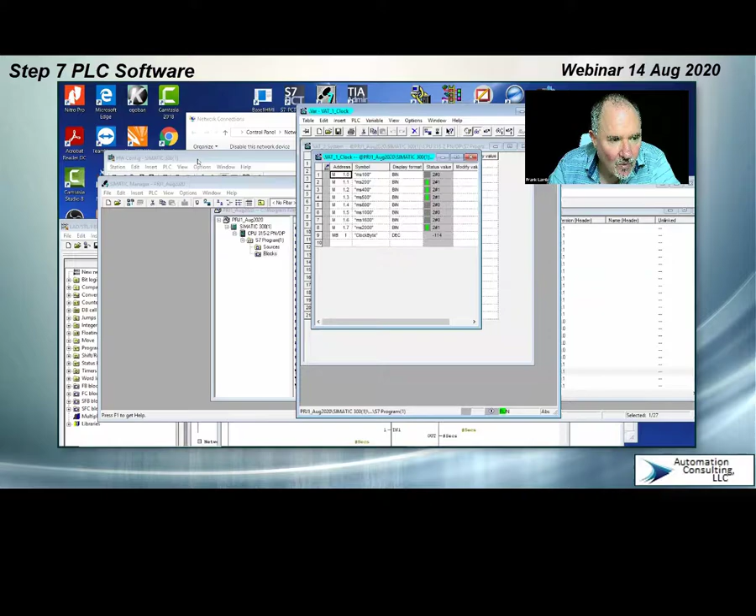So what I do here is in these function blocks, that pulse is actually coming in. Let's see if we can find it. Oh, wrong block. FC1, it's in OB1. So those FBs are these. Here's one, test time accumulator. You see it pulsing? So this says that I've been accumulating time for 1 hour, 41 minutes, 23 seconds.